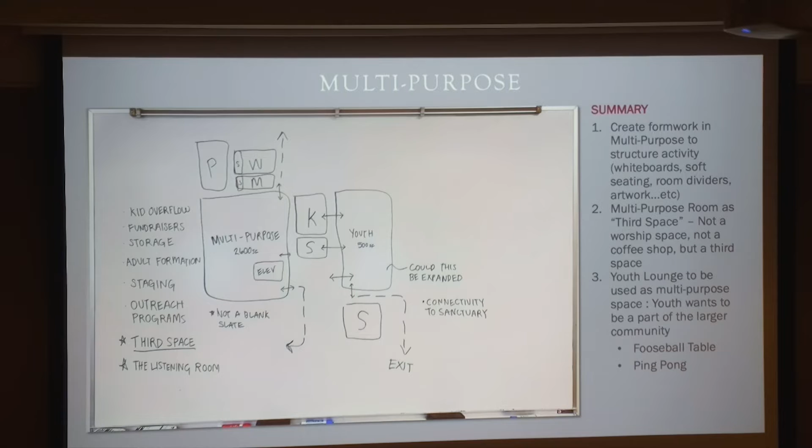Erica also looked at multi-purpose spaces—what spaces could be or are being used for multiple purposes, and what other uses could share that function. She also looked at office spaces, what could be shared office space versus what needs to be individual offices, and where those could be located. We'll look at that in a minute as well.

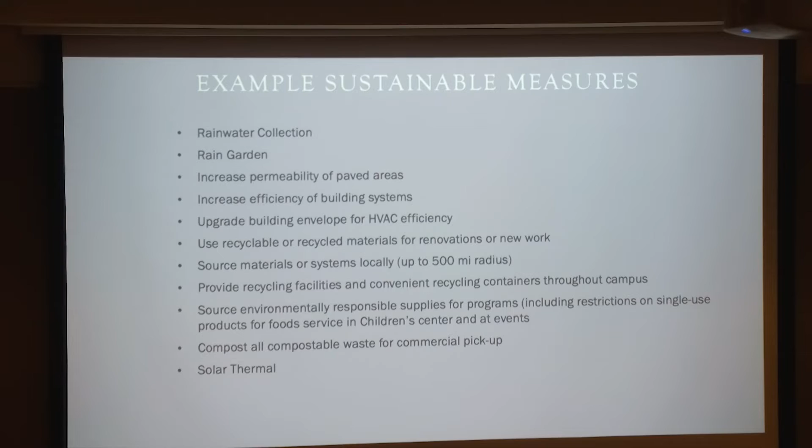We also looked, last time in the 2020 portion, at sustainability measures we want to incorporate into our master plan, and some of these items will make their way in there for folks to consider.

As Harry touched on, as we moved into the final workshop, which was about developing concepts and ideas, we began with the four key initiatives that arose as we worked through some of the things we were trying to accomplish. They were to find more efficient use of space, as Harry articulated.

The ADA access to the sanctuary was a key component that people felt needed to be addressed. The parish house renovation, it's time, and regardless of which use goes in that space, we need to renovate it. And then the idea of more outdoor space, more green space, particularly a columbarium and an extended or enlarged memorial garden, were ideas felt to be worthy of consideration as we began to sketch.

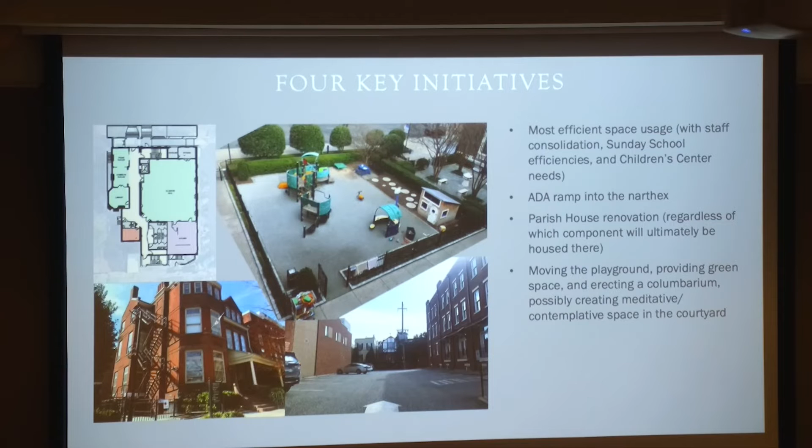So I was working with a team on the site plan and the exterior of the building, and the sketch we developed during the workshop involved a couple of key components.

The idea was that we could maybe relocate the playground over to this parking lot right outside this area. Since parking is a very important issue, you could create an elevated platform that would allow access from this room to an outdoor multi-function area, where you could have receptions outdoors.

You could have indoor-outdoor wedding events and things like that. Part of that would also be a playground, allowing the playground to be relocated here, which we'll talk about when we get into the schemes. The Children's Center would also be relocated here, which might make more effective use of the spaces in Michaux House. So the Children's Center moves, the playground moves, and we get an outdoor reception space here.

That could be at ground level if we didn't want the expense of an elevated platform, or as an elevated platform if we wanted to preserve parking. So those were some ideas from the charrette, which would allow for the construction of a columbarium and an extended memorial garden, really taking this entire space and making it a wonderful meditation and outdoor special area.

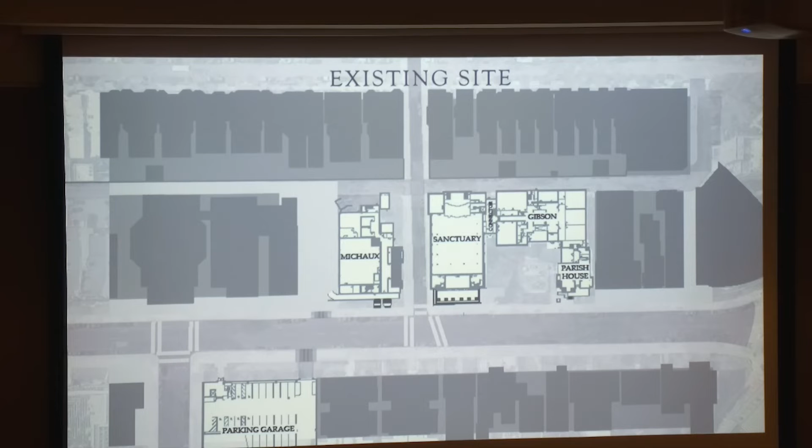Safety and connectivity from the garage over to the sanctuary were some of the key factors in the site plan discussion. Giving the entire campus an identity, a sense that you're part of St. James's, and that St. James's is part of the neighborhood, were also important factors we looked at.

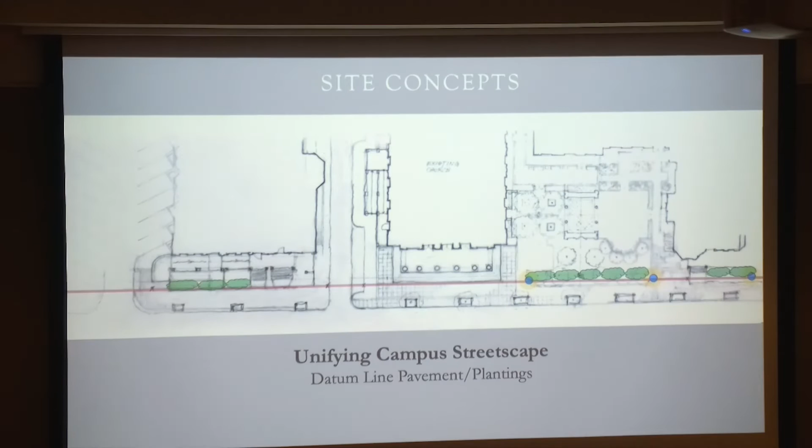One way to do that would be to use a kind of reinforced datum. Datum just means a line, a way of identifying an edge to the entire campus. That could be done with landscape or paving. One idea was to develop a more attractive, identifiable paving in front of the sanctuary, then extend that along the entire campus edge as a way of creating identity.

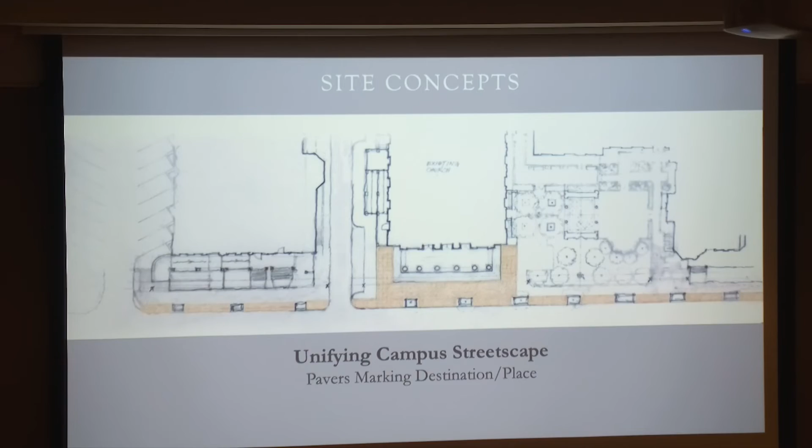That could be done with different materials, whether bluestone paving or concrete paving, and could involve landscape and street furniture, things that would give the campus identity and character. Also using light posts and banners as a way of saying 'I'm on St. James's campus,' something along these lines was talked about to enhance the presence along Franklin Street.

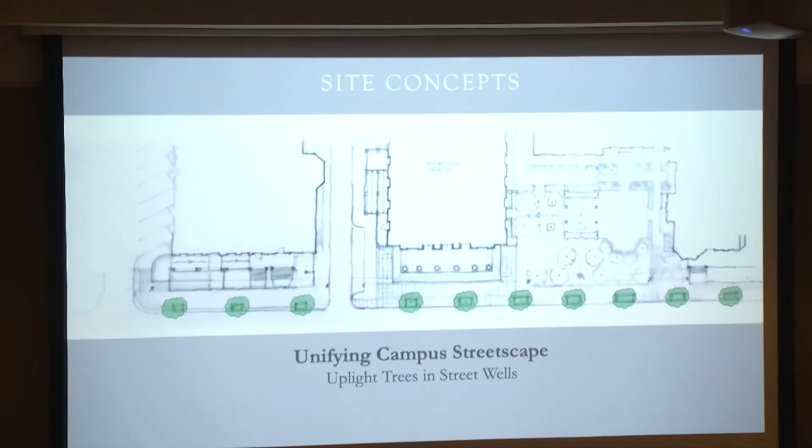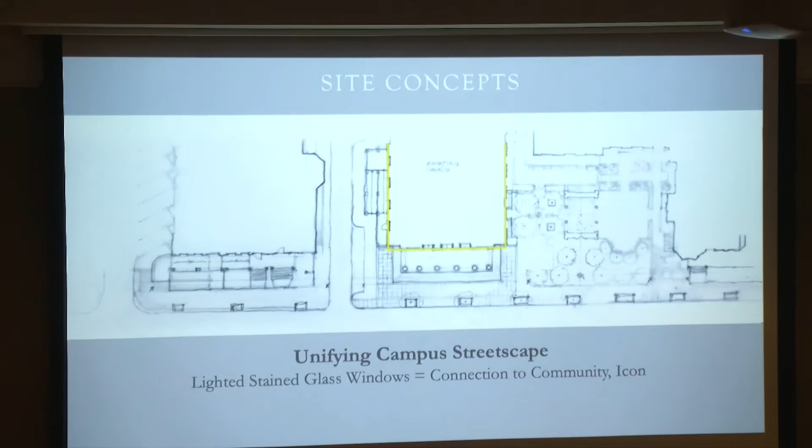Using the trees that are there, the tree wells, and maybe uplighting them, giving that area a special touch of lighting at night, which ties to lighting the church and finding ways to make it more of an icon, particularly in the evening, with lighting the exterior. You have an amazingly beautiful architectural building, and I think it could really be enhanced in the evening and become part of a neighborhood, having a presence through lighting.

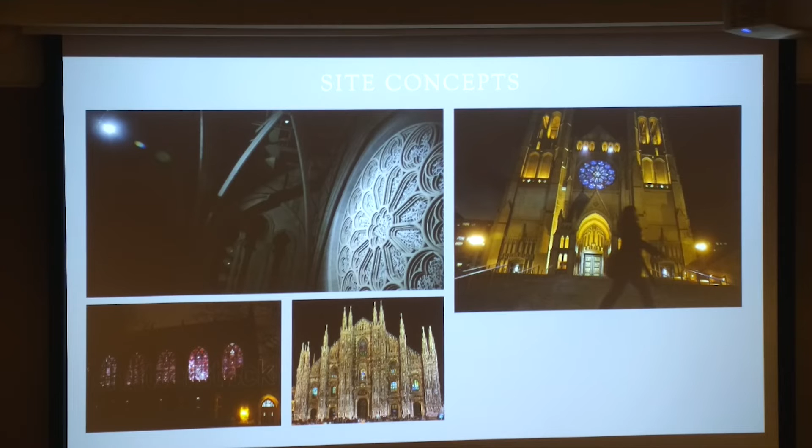One of the other ideas is to take the stained glass and light it from behind. This is a church - Grace Cathedral in San Francisco. That church took their rose window and lit it from behind, making it basically an expression of art in the evening. You all have some amazing stained glass which could do the same, just by creating a clever way to light it in the evening.

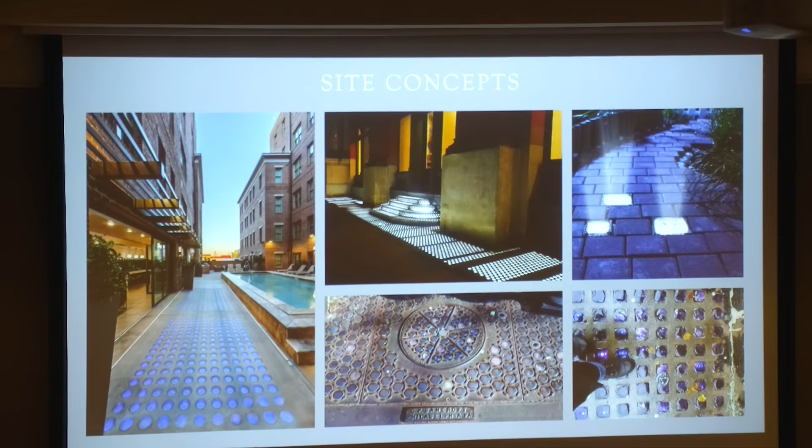Then, fun ideas like what if we put into the paving something special, either with light in it or color in it, something to begin to say 'I am on St. James's campus' as people walk up and down Franklin Street. So those ideas led to that concept.

But on Birch Street, after the charrette, we met with the West Avenue Neighborhood Association and the city, both of whom said they don't think closing Birch Street is a very valid idea, at least not permanently. No surprise.

So what could we do? We came up with an idea: what if we just took some parking off of Birch Street? That would allow us to get the handicap ramp in and even have an area for drop-off, while still having parking on the southern end - we could get 3 cars on - and Birch Street would remain open, with the idea that on certain events you might close it. We floated that idea, and no surprise, a lot of people weren't happy about giving up 3 parking spaces.

So that became problematic. Then we said, what if we made a piazza? What if we came up with a paved area on the southern end where it widens because of the way Michaux House steps back, and we could create all the parking there? There's 6 spaces on Birch now - we could put 6 parking spaces on the southern end and create a unique paving that would allow us to get the handicap ramp in, still have a way to drop people off, create a unique identity to the campus overall, and have a place that can handle cars on a regular basis, but on special events close it and get a 20 by 40 tent.

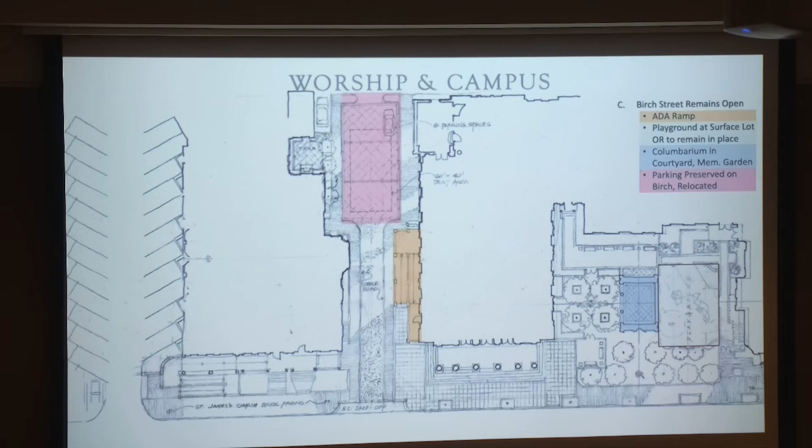So we could do outdoor events - a special celebration, maybe a wedding, with permission you could still close Birch Street and have greater safety and a space useful for gatherings. This works whether the playground stays or moves - this wasn't trying to be a playground scheme, so whether the playground stays here or moves didn't change that scheme.

So we started to work on developing that scheme, and here's just a rough rendering of what that might look like. You can see how the handicap ramp graciously brings you up. We take one of the existing windows, the one in the narthex, and turn it into a door to allow people to enter into the narthex. As people come up the stairs, others can come up the ramp, and it all works to the same location.

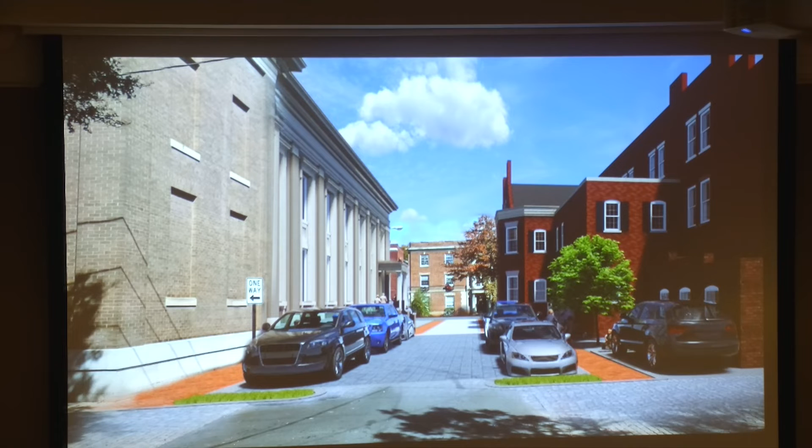Then we can create some paving in Birch Street that allows it to accommodate 6 cars. But when these cars are not there, you could still have bollards, whether retractable or brought in however you do it. You could still close Birch Street, put a tent in, and create special events when needed. So that's some of the things that have been developed on the site.

Thanks, Randy. So I'll quickly go through some of the ideas of the inside of the building, organizing those spaces inside the building as they exist now. Just a little bit of a summary of what is existing right now, and we can look at a plan in a moment as well.

At the basement level, taking these three buildings as Sanctuary and Gibson as one, Michaux House, and Parish House, the basements right now are multi-purpose room for Michaux, Parkinson assembly room, kitchen in the Sanctuary and Gibson areas, and in the Parish House there's the catacombs meeting space.

On the first floor of Michaux, that's a meeting space, that's where we are right now, and the parlors, which is really seen as staying as is, working very well as it is. The second floor has Sunday school classrooms as well as offices, and same on the third floor, youth Sunday school classrooms and offices.

In the Sanctuary and Gibson, on the first floor there's the Sanctuary, the nursery space, Children's Center, and conference rooms, and the second floor is a music program. In the Parish House, the first floor through third floor are all staff offices currently.

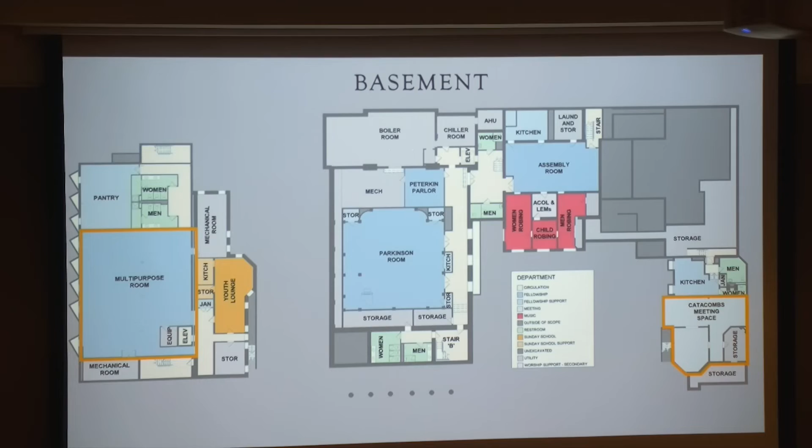So we're just giving some ideas, some eye candy about what those spaces might look like if they were renovated in some way. I know we've talked about third church spaces, third meeting spaces. Maybe some of those spaces could have a little bit more of a raw look to it, an open ceiling but comfortable seating.

So a lot of options there. When you have multi-purpose spaces, there's really a lot more options, obviously. And since they are working pretty well right now, that's really a lot about furniture and just some of the finishes.

Just to give you a brief summary of the four schemes we've come up with for concept ideas for the interior of the spaces: Scheme 1 shows staff offices all moving into Michaux above the first floor, Sunday school on the 3rd floor of Michaux and again in the basement as it is now for youth, and the Children's Center expanding from Gibson, where it is right now, into the Parish House.

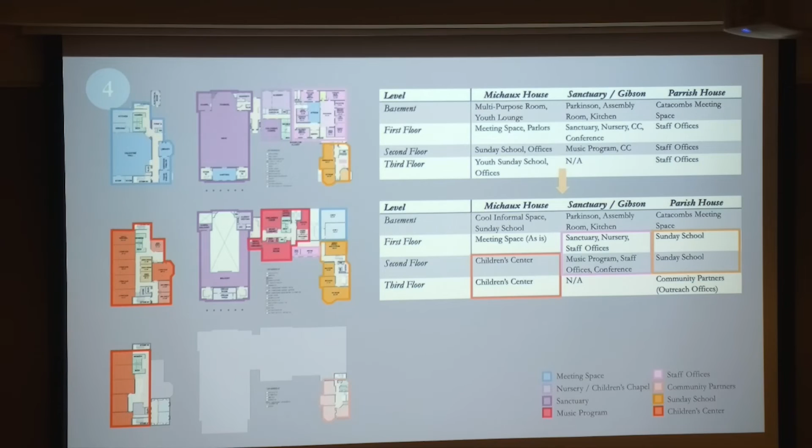So as we wrap up, we are meeting tomorrow with the West Avenue Neighborhood Association to continue discussions about the possibility of doing something like this with Birch Street. We are going to continue working with Harry and the Master Plan Committee to begin coalescing these schemes, determining the pros and cons, to give the vestry and the church some options to consider as they think about going forward.

With that, I think we will open up to questions.

Yes, ma'am. Is it my understanding then, if we lose this parking lot, pretty much unless we build a whole big thing over it... we already have a lot of parking issues here. Every time we have something special, we overflow the parking deck. We used to have extra parking over there, which is not available anymore. And I'm very concerned—today, when I got here ten minutes before church, I could not park in the surface lot. Fortunately, there still was a handicap space available across the street. So help me understand about the parking.

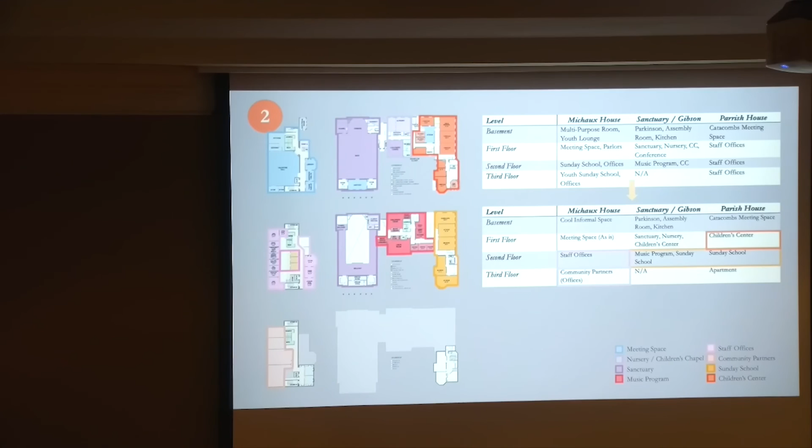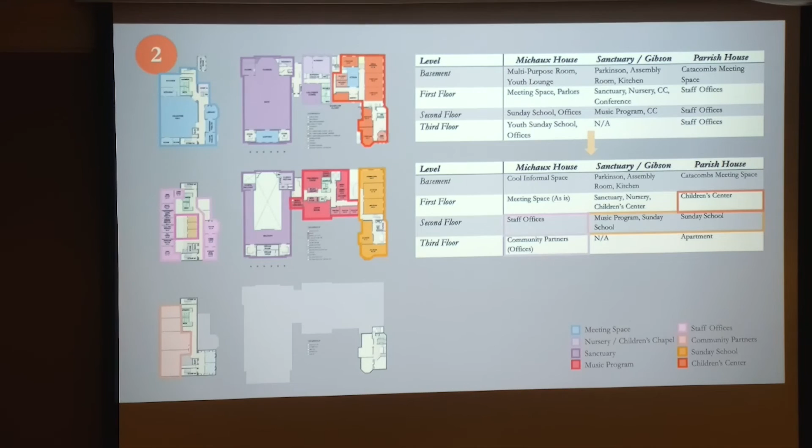For example, we showed, I think on Michaux maybe, an example of what we called community partners here. This potentially could be a space like that. In having discussions with other folks on committees, there may be some sensitivity about what community partners is and who gets to have that space. So whether that's called a multi-purpose space or a rentable kind of community partner space, I think that's still in play, and we'll probably have more discussions about that.

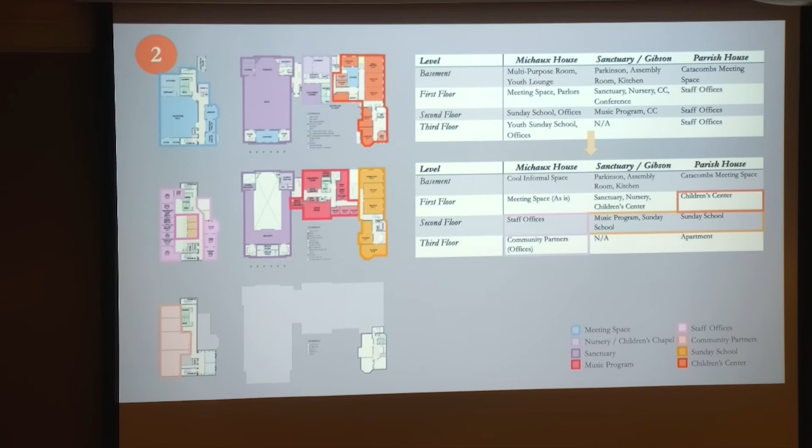The idea was for organizations - what we heard from our interviews with you all is that some of your partner organizations don't have very solid lease agreements. They're working on a shoestring budget, and so they're moving spaces constantly. Some of those folks might benefit from a space like a community partner space. It may be just an office, a couple offices, or a larger space. We tried to integrate that into our thinking - what spaces could actually serve that purpose. It could even be a renovated parish house. So those are still in play here.

So is there something, maybe I could ask you, is there something else we're missing with that? No, that was it.

I think it's important to remember that almost the entirety of this building is empty Monday through Friday. I guess that was my question - if you're saying there's space for communities to come in, you have an apartment option here, so clearly you could identify spaces that are not used enough. You just mentioned that above us is not used most of the week. Are there other spaces that are underused or not used enough, based on the original plan?

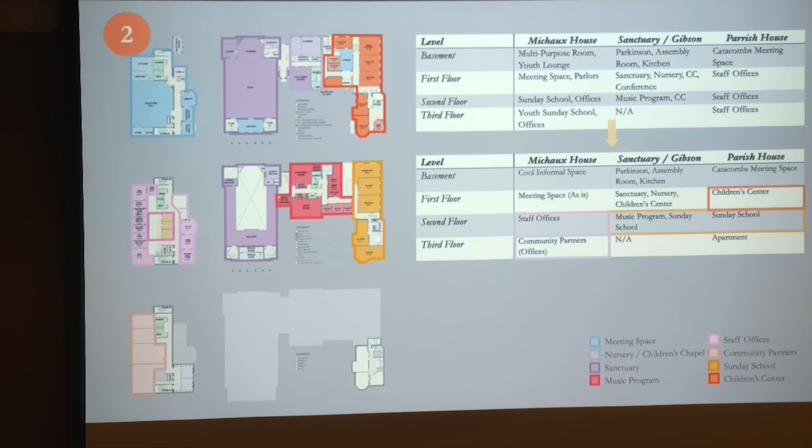Yeah, I mean, the multipurpose spaces seem to be used pretty well now. The basement spaces are used throughout the week a little bit for different programs - there's an AA meeting in some spaces, Boy Scouts, and others, but there's still opportunity for more use. If we looked at the schedule for all of these things - we did do a diagram, not in this presentation, that showed the schedule of all the church spaces throughout the week and on Sunday - almost everything's used on Sunday except for the Children's Center. So there are spaces in every building on almost every floor that have availability during the weekdays, and we've identified those in a separate diagram. I think there definitely are options worth looking at - it's not just about providing a service to other organizations, but also energy cost, because you're heating and cooling all of these empty spaces all week, and someone could benefit from them while offsetting costs with some kind of rentals.

Do you have a question? The question was about the shared space actually, and about the AA meetings, so I was curious - is the basement part of this renovation?

Yes, it would be. But I think the point with the basement spaces is that they're working pretty well the way they are now - they just need to be updated, and furniture could be a big part of that solution. Oh, we have a question over here and then a question back there.